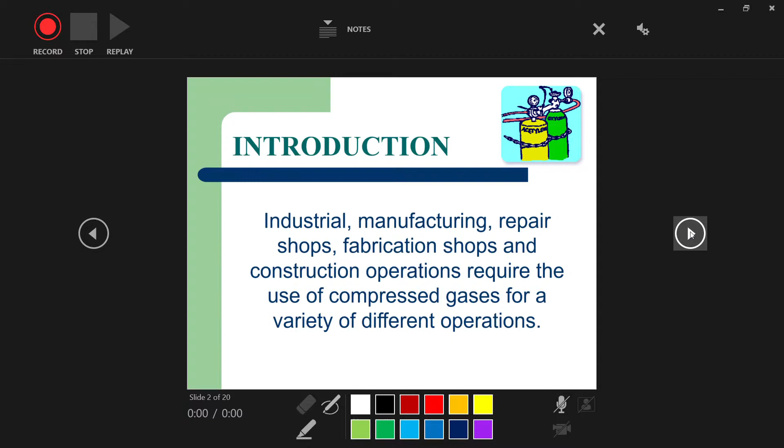All right, welcome back. We're going to cover here kind of quickly the compressed gas cylinder safety PowerPoint. It says here industrial manufacturing, repair shops, fabrication shops, construction operations. All these require the use of compressed gases for a variety of different operations. You really can't go into any type of industrial setting and not find compressed gases of some sort. So that's why we're covering this topic today.

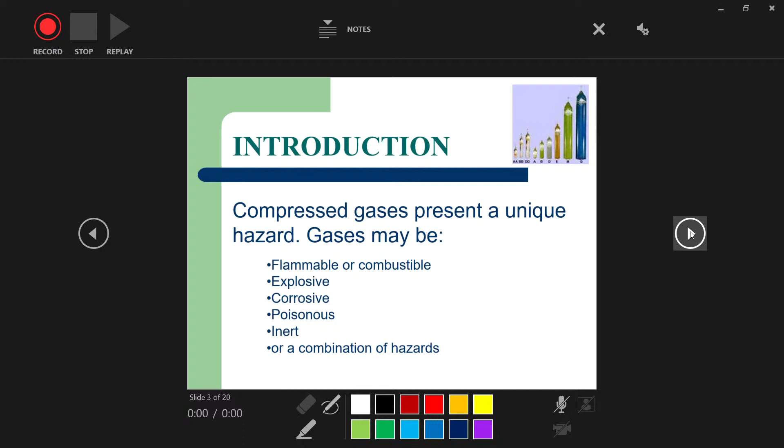Your compressed gases present a number of hazards. The gases could be flammable or combustible, explosive, corrosive, poisonous, or inert, and that's where an inert gas will push oxygen out of an atmosphere and could cause someone to suffocate, or it could be any combination of those hazards. And gases can tend to have a very low flash point depending on what kind of gas it is. Things like hydrogen, those are highly flammable and have a very low flash point.

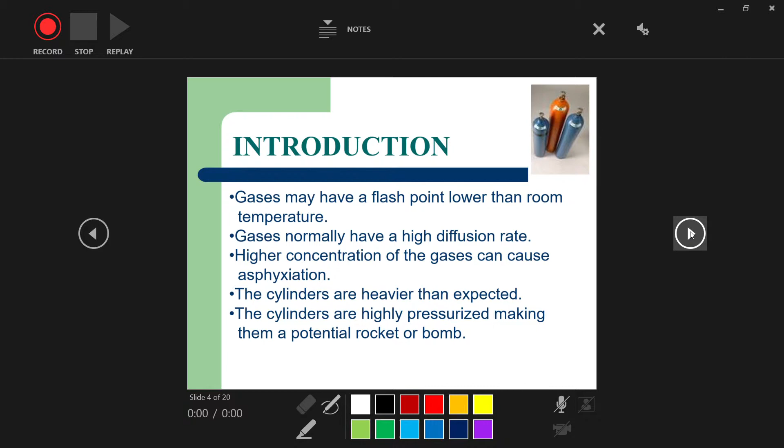These gases normally have a high diffusion rate because they are so concentrated, and once they start to escape, they can fill up especially a small space fairly quickly. The higher concentrations of those gases can cause asphyxiation, and even just the weight of the cylinders alone, they can be very heavy themselves. So they could fall over and hurt somebody, or fall over, and if the valve were to break off, that's when you get that torpedo situation. And of course, if your compressed gas cylinders are involved in a fire and they get hot enough, then they can also explode that way as well. So there's a lot of hazards around a very common item that we use in industry.

So care obviously should be taken when you're handling these cylinders, and be careful around the regulators and the valves. We'll go into that just a little bit more deeply here in the next few slides. And make sure that you're handling the hoses with care so that you're not developing any leaks, especially if you're doing hot work and you've got that flammable gas there next to you.

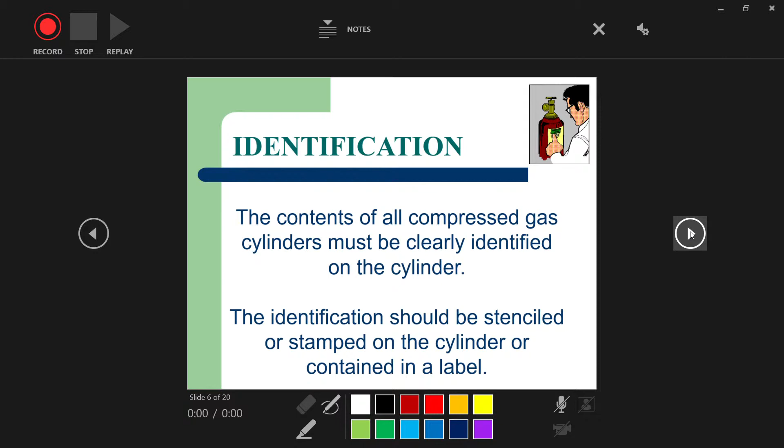Now, the contents of all compressed gases must be clearly identified on the cylinder itself. Identification should be stenciled or stamped on the cylinder, or contained on some sort of label that is there on the cylinder. So we should never be running into any situation where we've got an unlabeled, unidentified cylinder. So don't accept any cylinder that doesn't have its contents identified by name. If the labeling isn't clear, or if there's a tag on it that's not legible, then that cylinder needs to be marked as contents unknown and then returned to the supplier as soon as possible.

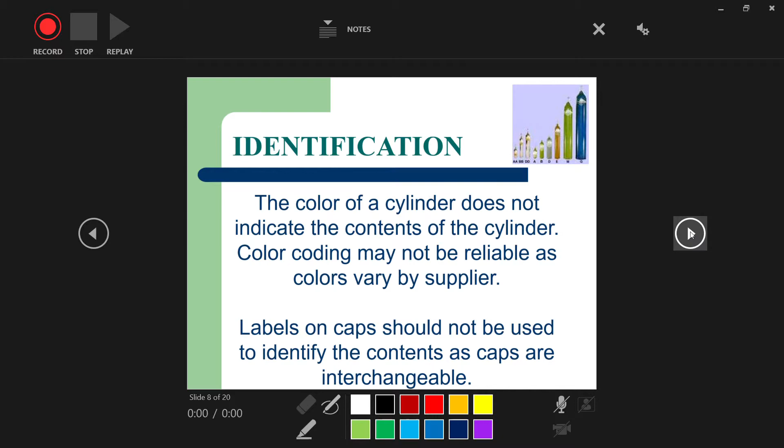And keep in mind that the color of a cylinder does not necessarily indicate the contents that are within that cylinder. It says there color coding may not be reliable, as colors vary by the supplier. And it says there labels on caps should not be used to identify the contents of a cylinder, because those caps, of course, are interchangeable. And we need to post conspicuous signs in areas where flammable compressed gases are stored. An example there would be hydrogen, flammable gas, no smoking, no open flames. So pretty obvious stuff there.

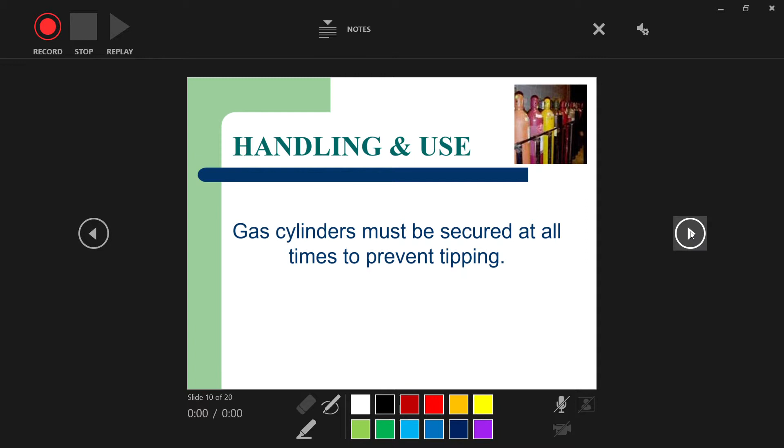And we always have to remember that gas cylinders have to be secured and stored upright at all times in order to prevent tipping. And you can see in that picture in the upper right hand there, it looks like they've built some sort of a racking system for all of their tanks, and they've got the screw caps, the protective caps, in place while those cylinders are in storage.

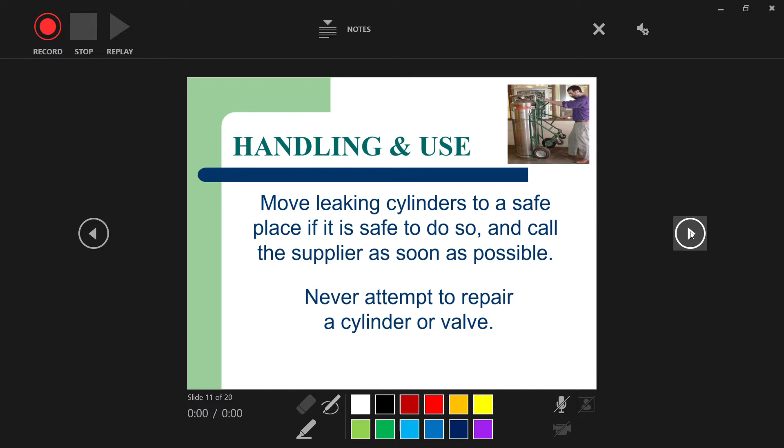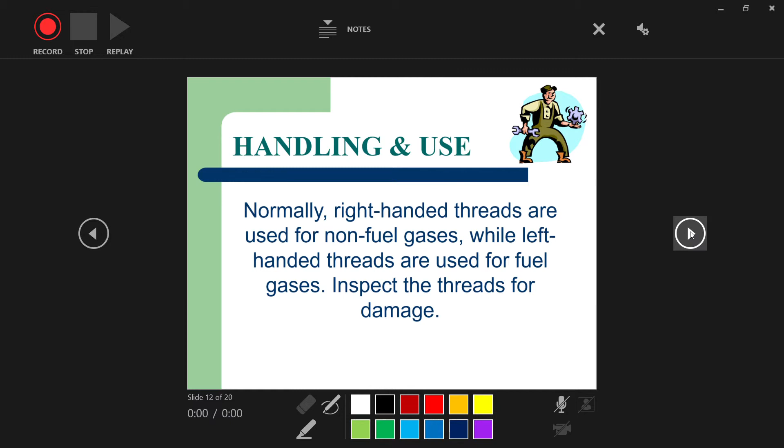And it says there to never attempt to repair a cylinder or a valve. If you got any trouble like that, just go ahead and hand that off to the professionals and let them take care of it. And something I didn't know, it says here, normally right-handed threads are used for non-fuel gases, while left-handed threads are used for fuel gases. And so that's another way to help identify something. Maybe if you don't know exactly what it is, that'll kind of put you in the right direction, maybe.

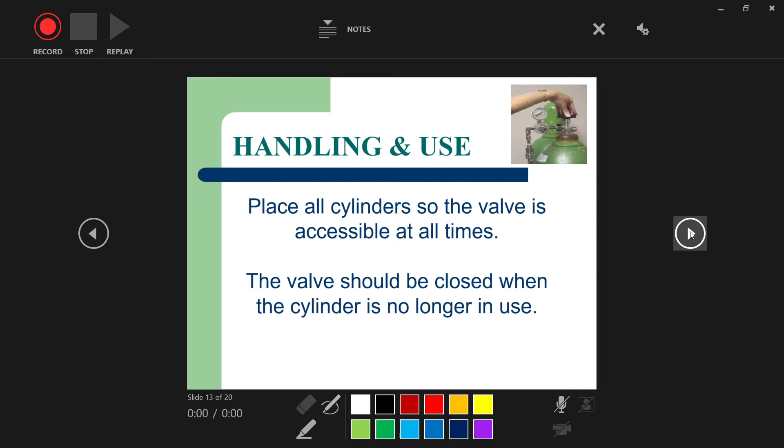Alright, and we have to make sure that we place all cylinders so that the valve is accessible at all times, and that valve should be closed when the cylinder is no longer in use. Alright, we always want to make sure that we open these valves slowly, and then open the oxygen cylinder valves all the way. And then it says there to backseat the oxygen cylinder valve by opening slightly first until the needle on the high pressure gauge stops, and then open all the way. And then point the valve away from you and warn others nearby before opening any valve.

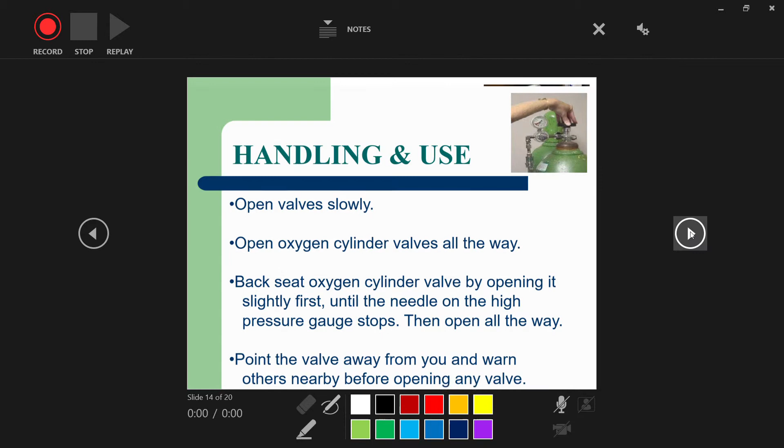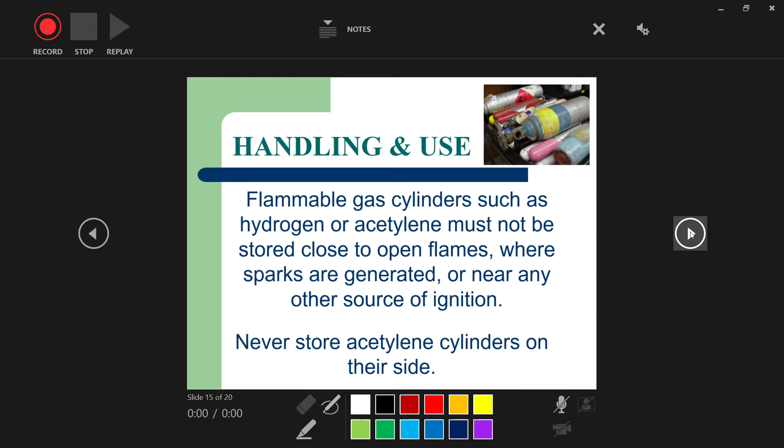Alright, flammable gas cylinders such as hydrogen and acetylene must not be stored close to open flames, obviously, or anywhere where sparks are generated, or near any other source of ignition. And it says there to never store acetylene cylinders on their sides. We don't store any cylinder on its side. It always needs to stay upright. There have been many cases where cylinders have been stored on their side without the protective valve cover, and then a forklift winds up shearing the valve off, and then that thing takes off like a torpedo. So that's obviously something that we want to avoid, because those can do a lot of damage once they get uncontrolled like that.

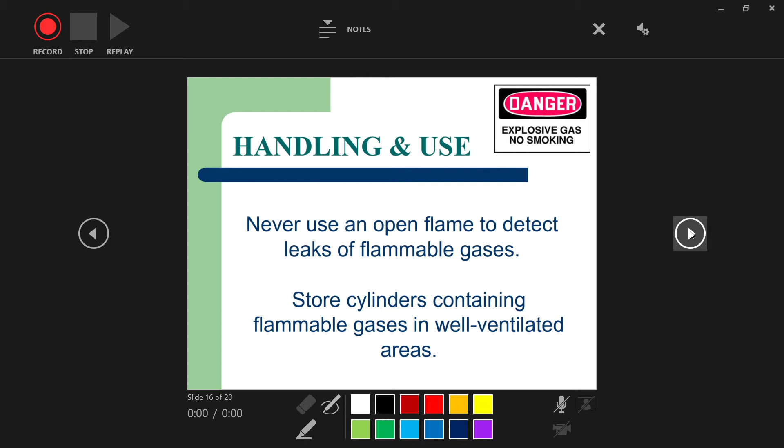And some more common sense type stuff: never use an open flame to detect leaks of flammable gases, and store cylinders containing flammable gases in well ventilated areas just in case there is a leak. It can ventilate.

Let's see here. Oxygen cylinders and flammable gas cylinders need to be separated by at least 20 feet of open space, or by a firewall that's about 5 feet high and a fire rating of half an hour minimum. Every case that I've seen in industry, people just go by the 20-foot rule. So 20 feet of open space between your flammable gas and your oxygen is what is required by law.

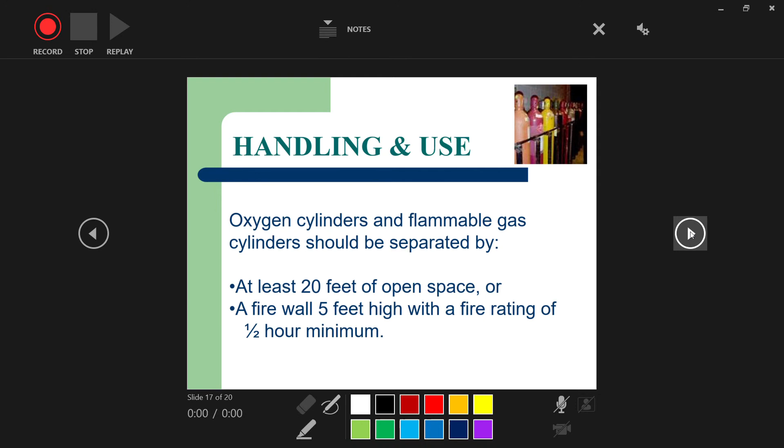And keep in mind that regulators are gas specific and not necessarily interchangeable. So a lot of your regulators will say right on there what it's meant to regulate. So don't go switching regulators back and forth.

And whenever your cylinders are empty, make sure that the valves are closed and that the system has been bled, but then of course close the valve. Remove the regulator, put the valve cap back in place, mark the cylinder as empty according to whatever your company's standard is, whether that's writing on it, empty, or a tag, or whatever that requires. And make sure the cylinder is returned to the storage area and put in its designated spot for the empty cylinders, and make sure you store those apart from the full cylinders.

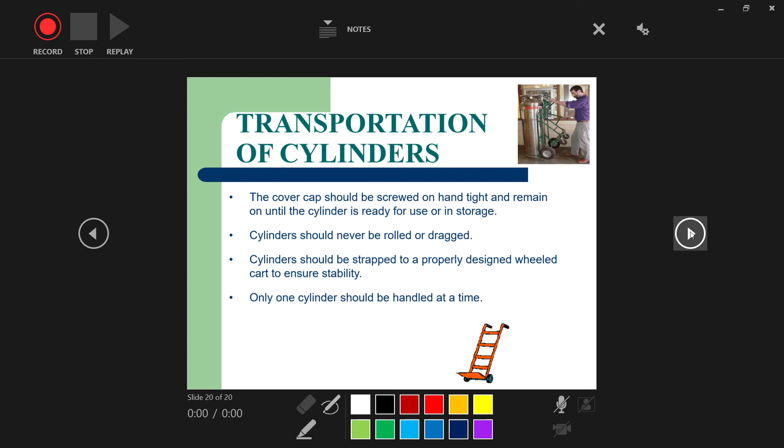And whenever we're doing transport of any cylinders, of course, we don't want to walk the cylinder just with us and our hands. That's a good way to lose that cylinder because they are very awkward and very heavy to move. So always use some sort of a hand cart. But make sure the cover cap is screwed on hand tight and is to remain on the cylinder until it's ready for use or in storage. And cylinders should never be rolled or dragged. That should be pretty obvious. And like we said, strap them to a wheel cart and only handle one cylinder at a time. And that's pretty much the long and short of compressed gas safety.